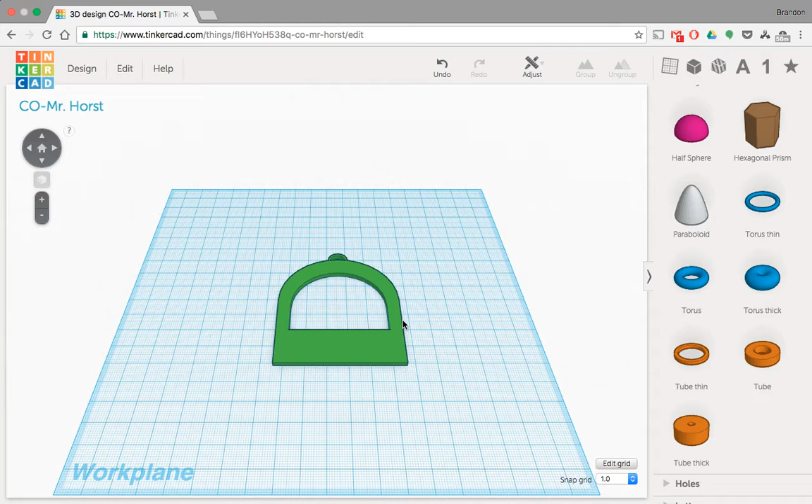This should be what your shape looks like on your screen. This is the basic of our ornament. If yours doesn't look like this, then you probably want to go back to one of the other videos and find which steps you are missing.

For right now, we are done with the geometric library, so I'm going to click this little triangle to collapse it. And now our library is just back to where it should have been.

The one thing that makes this process a lot easier is we're going to lift the work plane. Right now the work plane's on the bottom of our shape underneath it, so there's a bunch of ways to do this. I'm just going to click right up here where it says show helper shapes. You can also do it right here at the side where it has helpers. It's the exact same thing.

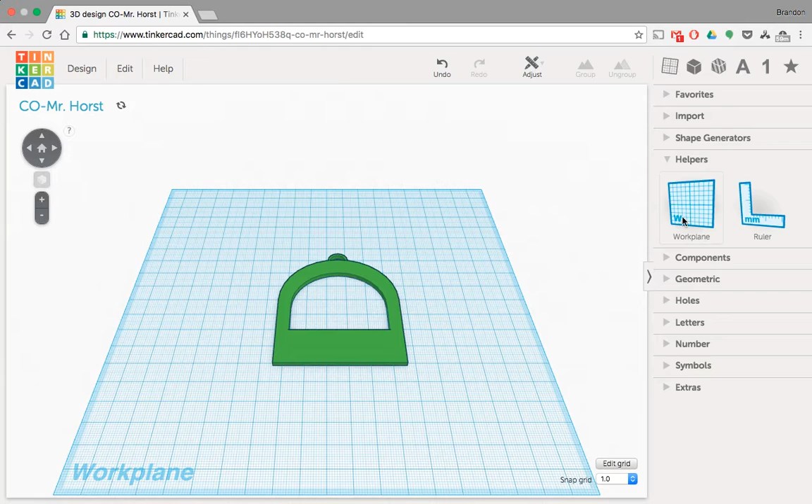So I'm going to click that, and then my work plane, I'm going to click and drag, and stick it on this flat part of my Christmas ornament. If it works right, you'll now see our work plane is kind of an orangish brown, and if you rotate and zoom it around, you can see the work plane is now on top of our shape. That's a very important step to get done so we can start adding words and shapes to our ornament here.

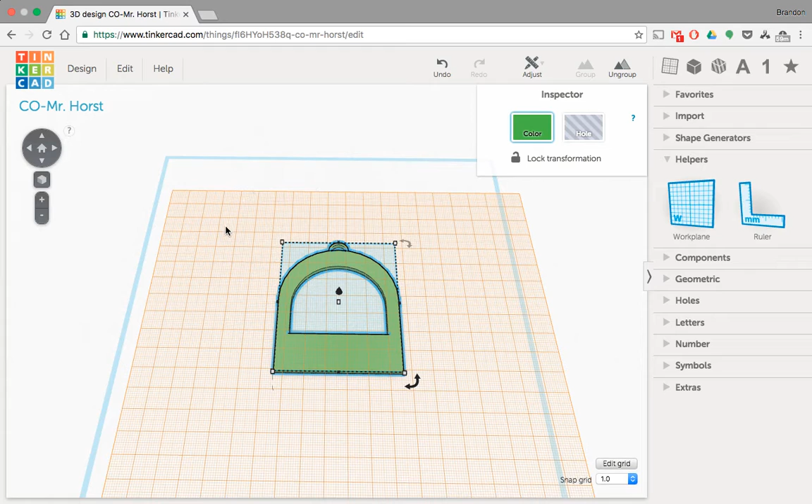So I'm going to click off to the side because we're done. And it is kind of confusing because now my shape is covered up by these grids, but that's completely fine. Everything you add to this is kind of up to you. So some of the things you can do here are in shape generators.

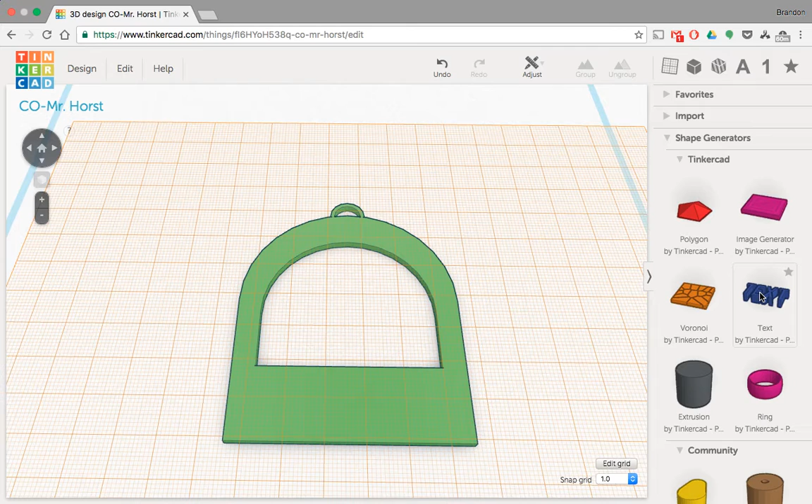There is a text shape generator, and I'm going to use one of these. I'm going to click and drag it out to the top of my ornament here, and it is huge. So the two things we want to do: our height only needs to be 2 millimeters tall, and there's a few ways to do this.

You can either grab this white box and shrink it down to 2, or over here at the side where it says 10 millimeters, you can click your mouse in there, type in the number 2, press enter, and then it sets it to be 2 millimeters tall. Either way is fine. I prefer using the box method just because I can see it and I know exactly what it's doing.

And then as far as what it actually says, right here where it has text, you can also change the font if you want to try that. We'll try Major Snafu and Techniku. Some of these are really hard to read, so truthfully I would probably just keep it on that first one.

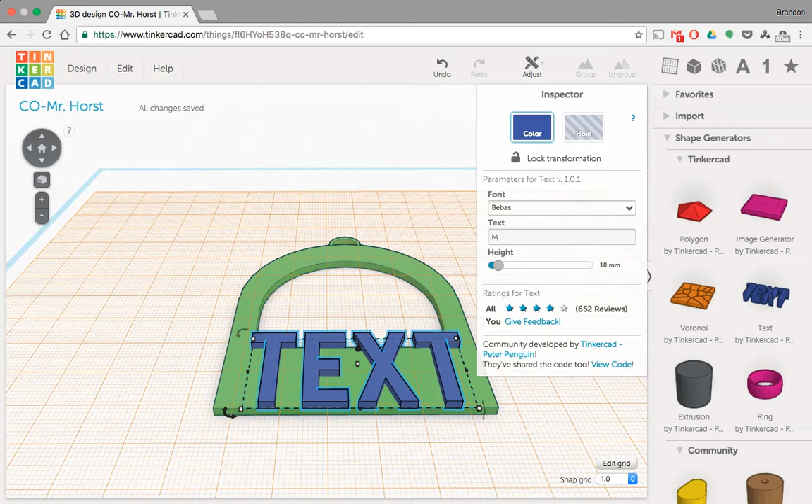Mine is going to say my name, so that's the one thing yours will have to say, is it should say your name on there. And then it is too big, so again we need to use our tools to resize it. I'm going to click these little squares at the side and push it in. And if you need to zoom out, you can do that.

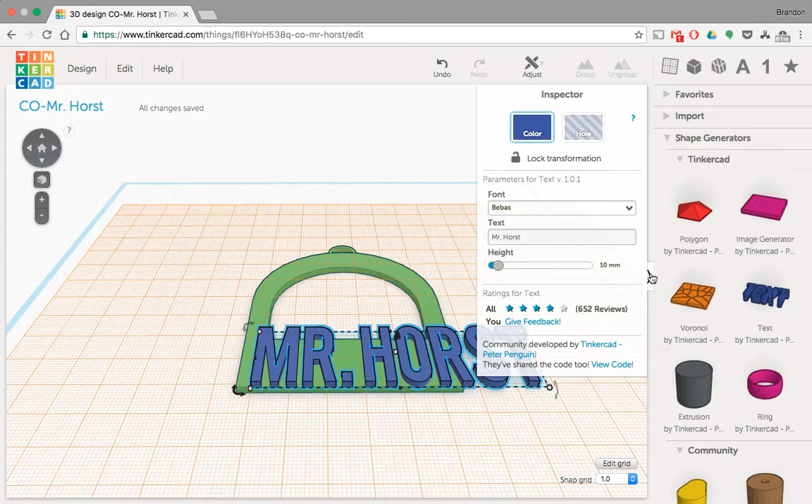You can also tuck the library away by clicking these little arrows at the side, which gives you some more room. And then I'm going to keep resizing and stretching this. I can tell it's too tall, but it's really hard to see, so I'm going to tip this way up to the top.

And I know at the top here, again if you need to zoom, you can use 2 fingers on the touchpad. Shift and 2-finger clicking lets you drag it around. And I can see there's a little square right there, so I want to shrink this so it is pretty short. Okay, so there's my name.

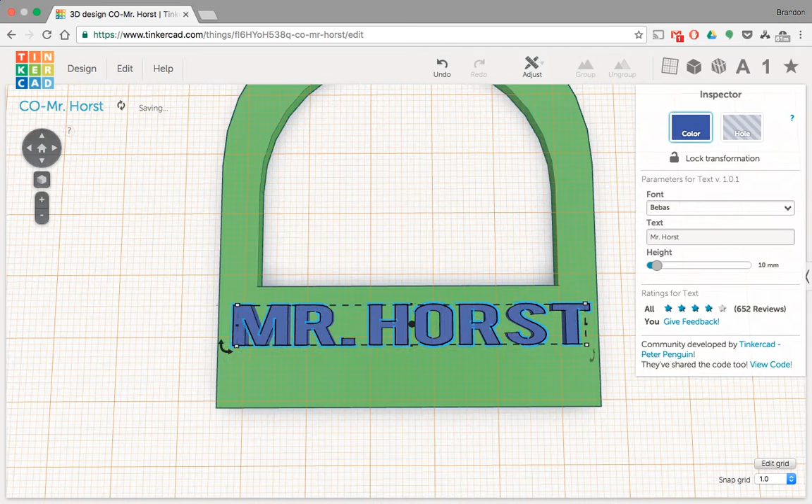I can use my arrow keys to nudge it around. If you want to be very precise, draw a box covering your shape and your name, do adjust and align, and then you can line it up right here in the middle, and that will center your name perfectly on there.

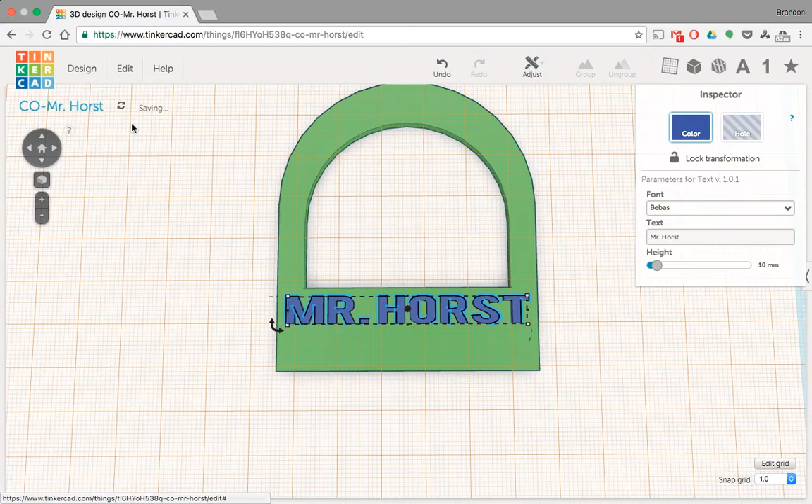As far as adding more text, the easiest thing to do is edit and duplicate, and then use your arrow keys to nudge it down. That way it's already changed most of the size for you, most of the work's already done.

So at the bottom, I don't want to say my name again. I actually want to say Christmas. And since this is 2016 when we're doing this, we're going to just type in 2016. Obviously, if this is not 2016, you'll have to pick the correct year. And then we'll grab these boxes at the end, shrink it in on both sides.

And then all my words kind of fit on the bottom. So you don't necessarily have to have Christmas 2016 if you want to put some shapes instead, whatever it is. Your name would be the important piece though, so that people know that you created it.

The kind of cool part is now that we have 3 things. My name was 1 sentence, and I really don't like the size of that one, so I'm actually going to shrink this in a little more, just to make it a little smaller.

And then once I'm all done, just because I like things lined up nice, I'm going to draw a box covering all of my words plus my shape, do adjust and align, and then hit that center button one more time. And that just lines everything up. All 3 things are now lined up in the middle.

So that's the bottom part of my ornament, and then here in just a second we will cover the top of your ornament.